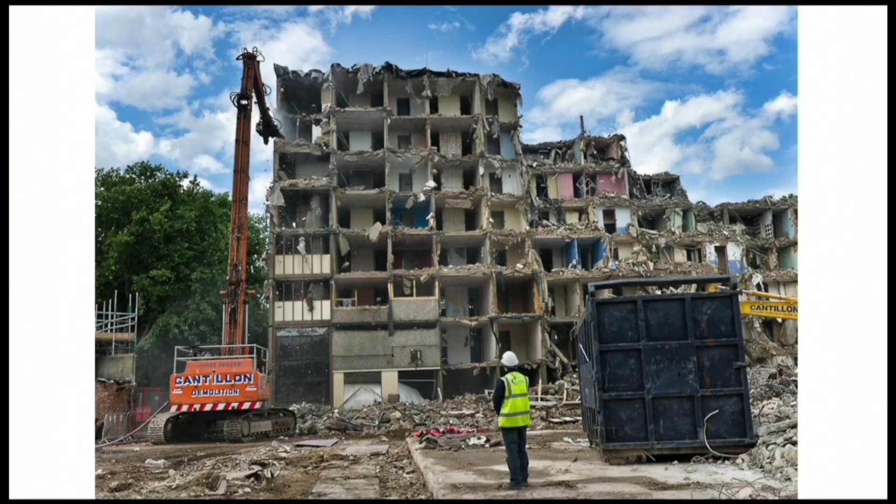This is a very familiar sight for us in and around London, and it's neatly captioned by a quote from David Cameron, who said: 'Post-war estates across the country are ripe for redevelopment. We will sweep away the planning blockages and take new steps to reduce political and reputational risk for projects' key decision makers.' That's sinister, isn't it? And investors: 'I believe that together we can tear down anything that stands in our way.'

And tear it down they have, and I dare say this is not an unfamiliar sight for you as well. And in its place, and in other places which could well be developed for social housing, we have this kind of thing. This is South London, it's Battersea. And this is sort of global capitalism descending on a site in central London and making of it what it will. Sort of just capital in its most abstract form, swirling around, smashing buildings down, throwing up other buildings. And this is housing seen as investment vehicle, as commodity, and not as basic infrastructure.

And I think this lies at the heart of the crisis which we're facing at the moment in London, presumably one of the richest cities the world has ever known. There are currently 170,000 homeless people - nearly 10,000 of them living on the streets, but also people living in temporary accommodation and in hostels. So it's a shameful situation, and as I say, if the post-war generation were able to deal with this, then surely we, a much wealthier country now, ought to be able to do the same.

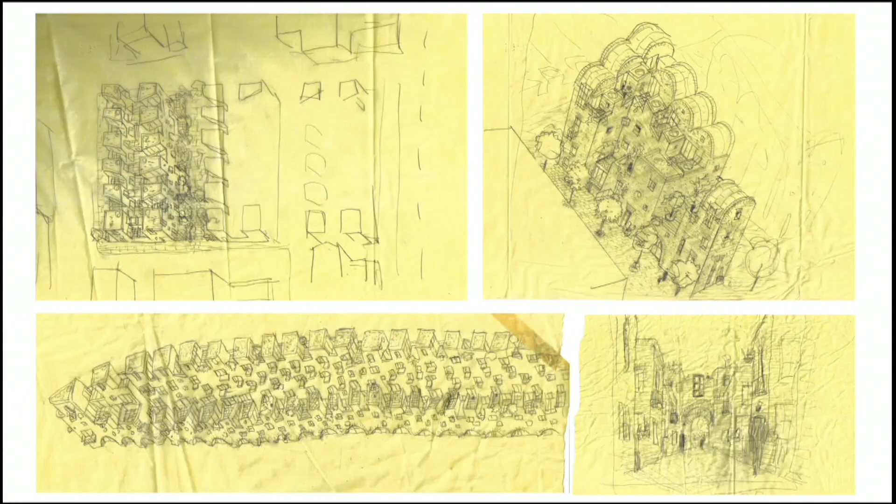I'm an inveterate sketcher, and I have sketchbooks, but when it comes to the projects themselves, I also overlay sheets of yellow tracing paper, and in a sort of additive, iterative process, build up layers, layer upon layer, the changing design as it develops. It's quite fun sometimes to go back through where you started and where you get to. So here are some examples, working three-dimensionally a great deal as well.

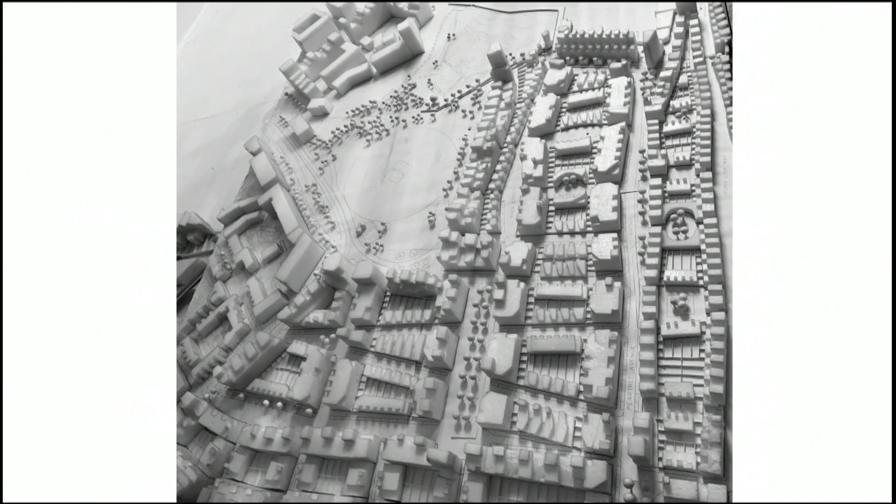And then the very large-scale models. This is a model we made of Greenwich Millennium Village, which we were involved with at the early stage. These are foam models at quite small scale, where we can see urban form, massing, the width of streets, and understand whether buildings are too close together or whether they feel about right.

And then we go up a scale, where we're starting to look at fenestration and in more detail at the public spaces we're creating. And upper scale again, where we can start to look at interiors. So that model in reality is probably about that big.

So this is the first of the built projects I'm going to show you. It's called Donnybrook, and we basically cut our teeth on this project. It's 50 or so homes. It was a competition run by the Architecture Foundation in London. 100 or so, more than 100 practices went in for it, and we hit the jackpot with it, which we had no right to do because there was only 2 of us in the office. We didn't really know what we were doing, but sometimes that's quite an advantage - you do things which you wouldn't perhaps do if you were a bit more jaded.

And so this is a project which has got 50 or so homes in it. You can see if we can get this pointer working.

No, not that one. Oh, what have I done? Help! Could somebody help? Oh, there we go.

So that's it there, look. There are 2 streets, you know, I was talking about streets. This competition, I think, was asking for a fence around the site and an apartment building in the middle of it. Well, we inverted it, and we said on our competition boards, because you always need a strap line, this scheme is a celebration of the public social life of the street. They didn't ask for streets in the competition, but it captured the imagination of, I think, the judges. So there are 2 streets, and it widens out a little square in between the buildings.

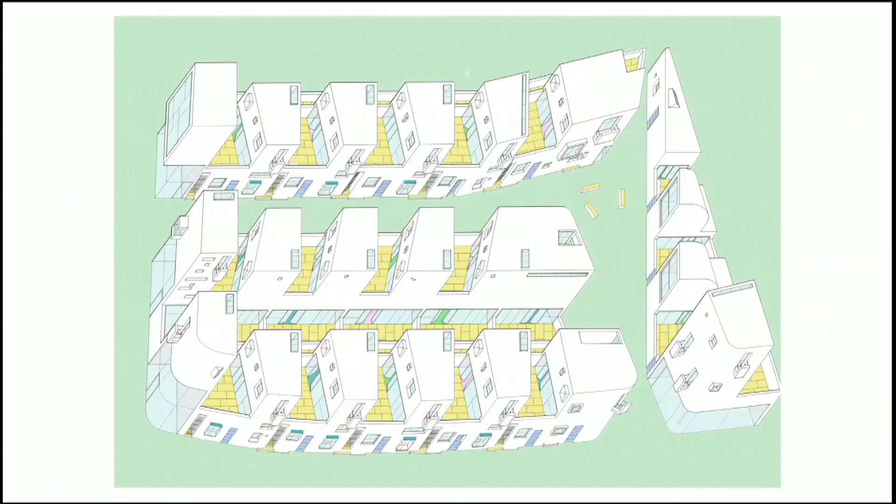The ground floor is a single-storey 2-bedroom unit, which has a rear courtyard. The buildings come right up to the street edge, and our client at the time, when we won the competition, said we need front gardens - defensible space was what people talked about in those days. And I'm thinking, well, defense against who? You know, my neighbors. This is the house where I lived at the time. And it seems wonderful to me what can happen when people have ownership of a space at the edge of the street and can take control of it.

So this is the type, as I say - these are cottage flats, sometimes called Tyneside flats, where you go into a house there, which is a ground floor house, and up to a house there, a flat there, which is the upper flat. So they look like houses, but they're flats.

And these roof terraces up at 2nd and 3rd floor level - again, I was able to take people. I'm a great believer in finding a precedent for what we're doing. I feel very reassured by precedent, and I think it also helps with clients as well. So the miracle was that it got built.

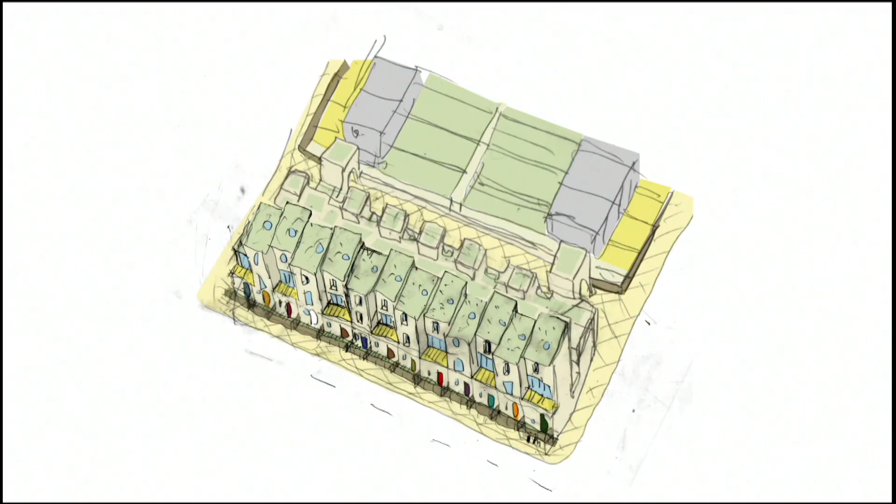So the next project is more conventional. The one I've just shown you is a reworking of a pre-modern way of doing flats. This is more conventional because these are townhouses, and it's another social housing project.

I teach a day a week, and we'd come back from a trip to India, and I imported this idea of what they call Jali walls—a perforated brick wall—as a way of celebrating the street edge, but also the arches, which are ubiquitous both in India and in the UK, as a way of making a building with a powerfully civic presence.

It belongs to the street, it belongs to the city, but also each one of these gardens belongs to a person who lives there. The articulation of the roof also emphasizes the notion of it being a terrace of houses about the street and about continuity, but each separate occupancy is celebrated in the architectural detail.

Increasingly we work with brick. Some of the early projects are render—sometimes white render—and sometimes those rendered projects are really well looked after; Donnybrook has been, others haven't. So where we're working for social housing providers, who have thousands of properties to look after and not very much money to do so, it feels to me now like brick is a better option, although from an ecological perspective it has its challenges.

This brings me to another social housing project in the East End of London, in Stepney this time. These garages and storage units lie at the back of a 1950s, 1960s housing project. Our client said we've got terrible overcrowding problems, big extended families living in 2-bedroom flats. Could you build 2 or 3 houses on this site, and use all that green space and everything else?

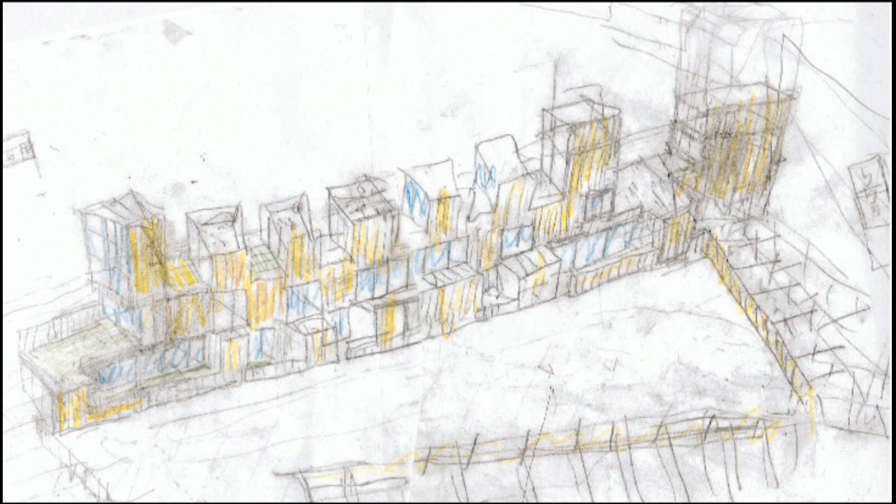When we get a new project, you're always looking for a ray of sunshine. It was quite an unforgiving site, not the loveliest place, but we found these gardens, these timber fences where people had started to take control of the space outside the back of their houses. So we came up with the idea of a timber building, echoing the timber of those fences and the informality of that, pushed back against the boundary, trying to retain the green space in the middle to be shared by existing residents and new people moving in. By sharing the garden rather than everybody having their own, and giving them all roof terraces, we were able to get 7 or 8 townhouses rather than 3. Our unconventional design really unlocked the possibilities of the site.

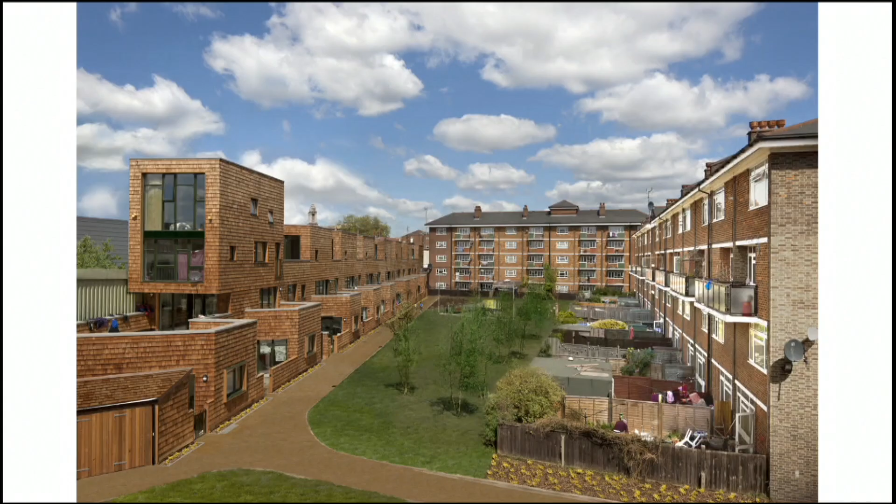It still feels like a miracle, even though we finished this project years ago, when you go from a sketch - and that was one of the early sketches of the project I just showed you - and it comes out pretty much as you thought it might, hoped it might. So these are enormous houses. That one in the foreground is a 7-bedroom house.

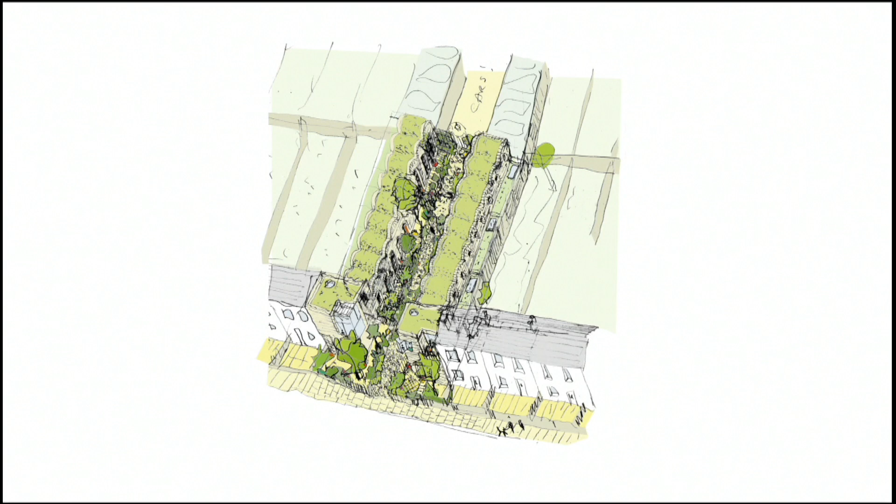So that sort of logic talks about an architecture, a type of housing which suits people who are very sociable. I think a point here is that there are all sorts of people in this world, and the attempts that government and legislators make to try to legislate housing to suggest there's a Mr. and Mrs. entirely normal, and that everybody wants the same things from their home, is such a nonsense, isn't it?

For one person living at the top of a tower block, sick of seeing people all day, wanting isolation with a view, that's understandable. But for other people, living on the street edge, knowing their neighbours, having that more intense relationship, suits them. So when anybody tries to tell me what housing should be, I remind them that there are so many sorts of people in this world, and housing should reflect that in all its different forms.

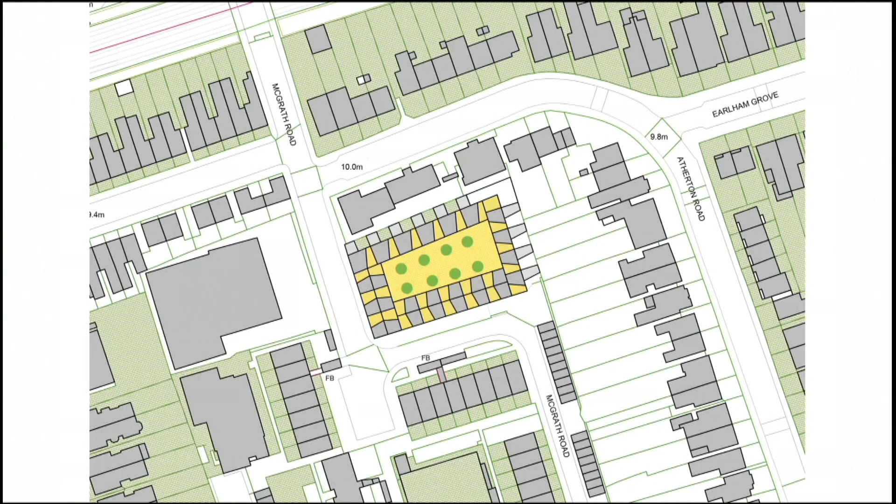So this is another back-to-back housing scheme. It's in a 60s housing estate. It was an empty site. It makes a corner here - those are two streets. It backs onto some Victorian housing here and some 80s housing here. Each one of those is a house. Those are all houses fronting this way, and those are all houses fronting into a central courtyard. You have 4-story houses, 3-story houses, and an archway which brings you into this courtyard and another one which brings you out here.

In that house there's a kitchen on the ground floor, a bedroom, and a living room, and the living room has a little courtyard up at the top of the house.

I did a talk once at the RIBA in London, before we built any back-to-back housing, and I was saying I'm thinking of doing some back-to-back housing. We think it's a really interesting way of building quite sustainably, because there's not a lot of external wall to deal with, and quite cheaply for the same reason. It seems to me a type that really helps produce a kind of sociable vibe amongst neighbours. And so we had the Q&A, and somebody stood up at the end and said, well, I grew up in back-to-back housing and it was hell.

Awkward. It's really the unhappiest time of my life, they said. And to my relief, somebody straight after stood up and said, well, I grew up in back-to-back housing and it was the happiest time of my life. It comes back to the point that what suits one person doesn't suit another person. But it also reinforces the responsibility that comes with housing. It's quite a scary thing, because when it's done wrong and things go wrong, it's not going to get knocked down. It'll be there for decades and will affect the lives of generations.

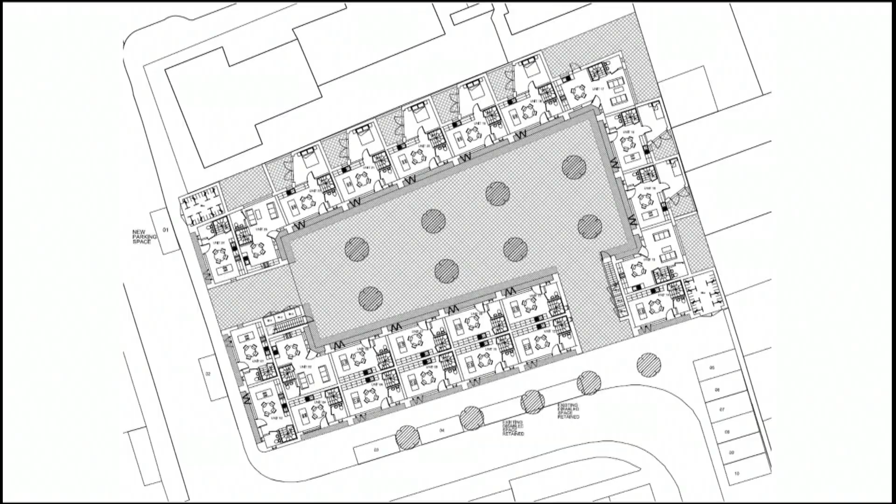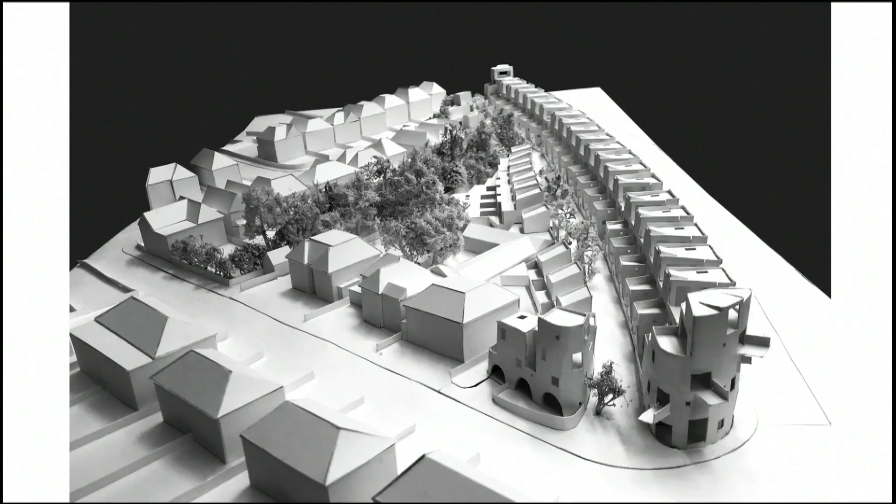Richard was talking about our project on a motorway. We get lots of rubbish sites, but this really took the biscuit.

So that there, around there - oh, sorry - that there, around there is the motorway.

We won this in competition, and all the other projects - it's a very difficult site - had 3 or 4 apartment buildings along this long site. Their approach, they managed to get 50 or so homes. We got 100 homes with a project where the architectural strategy really unlocked the site.

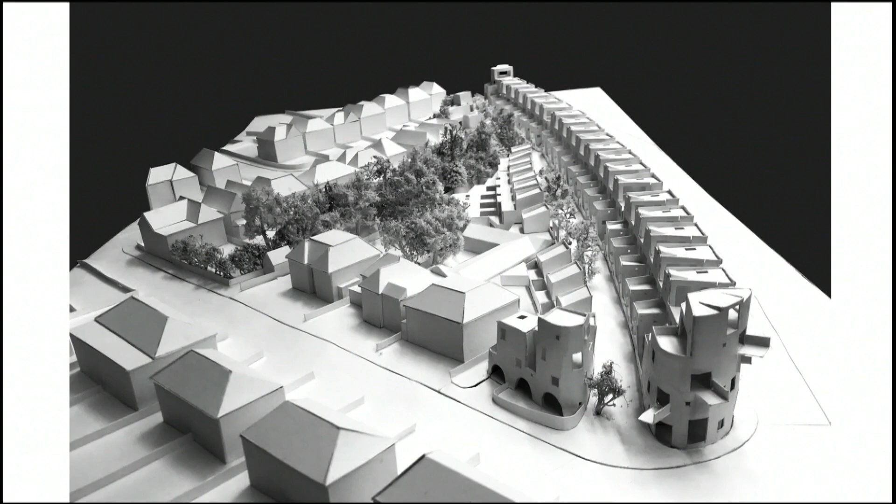The strategy was to build a wall building against the motorway, thin enough that it's one room deep, so every room in this wall building can have a window opening into what is here, a little mews street, where you could literally hear a pin drop. You would never know that the traffic was thundering past on the other side of the road.

And there is that terrace of effectively tenement blocks, kind of walk-ups - each one's a little tenement with one flat per floor - and then a row of houses on this side.

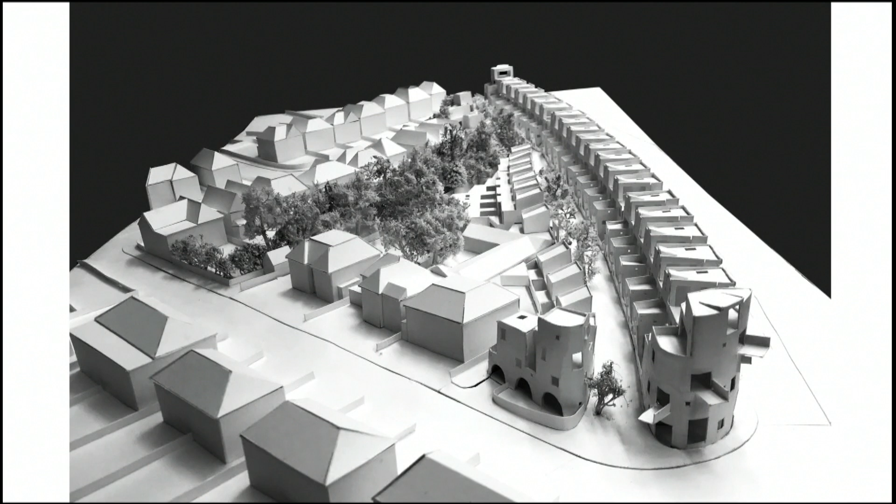And again, that's a sketch done virtually on day one. It's not that I'm inflexible or anything - how about that? If it had been that easy, that would have been good.

So there was repetition again in here, but a recognition that this corner is rather special, and there's an apartment building with a little lift in it, and 2 flats per floor.

We're making something of the entrance into the mews, but also something that you see as you drive down the main road. So it's an interesting project because the identity of this side is quite muscular, quite heroic, quite bold and solid, gives way on the other side to this space which feels much more domestic - it's softer, softened by the greenery, but also by the stepping of the architecture in these terraces.

I look forward to revisiting each summer to see what started to happen - this is a few months in - and it will hopefully gather pace as people really start to take control of the space that we've created for them here.

Incidentally, it was a requirement of planning that we had car parking, but there was a steep slope across the site, so there was actually a car park underneath here.

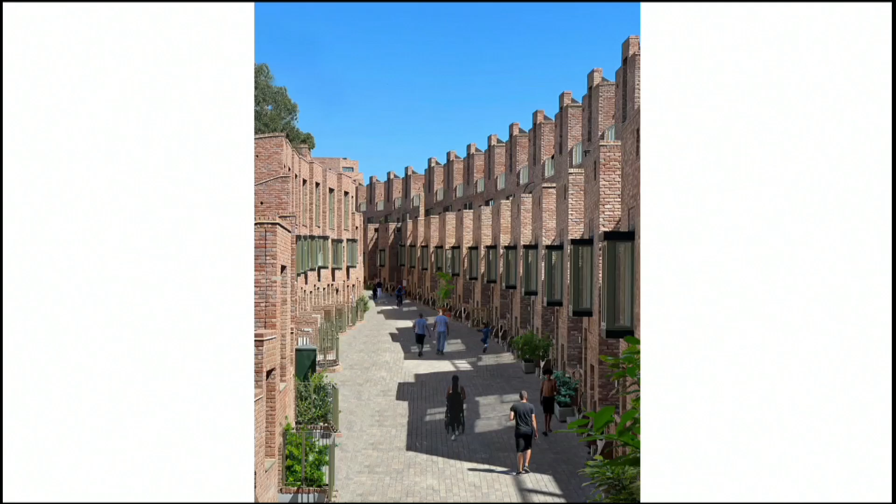So as our buildings get bigger, we try to stick to our guns - the importance of the street, active frontages on the street, front doors at regular intervals along the street.

The modernist apartment building often had a single point of access, and very often the city really wasn't greatly of interest to some of these people, or certainly the street wasn't.

But when we do our bigger apartment buildings, we're saying it remains really important how it relates to the street. So each of these ground floor units is actually a maisonette, like a little house, with its own way in through a gate into each separate unit.

One of these gates leads into a staircase and lift, which brings you up into the main part of the project. So even when we get bigger with our projects, we still attach a great deal of interest to the street, and we're also after a degree of visual complexity.

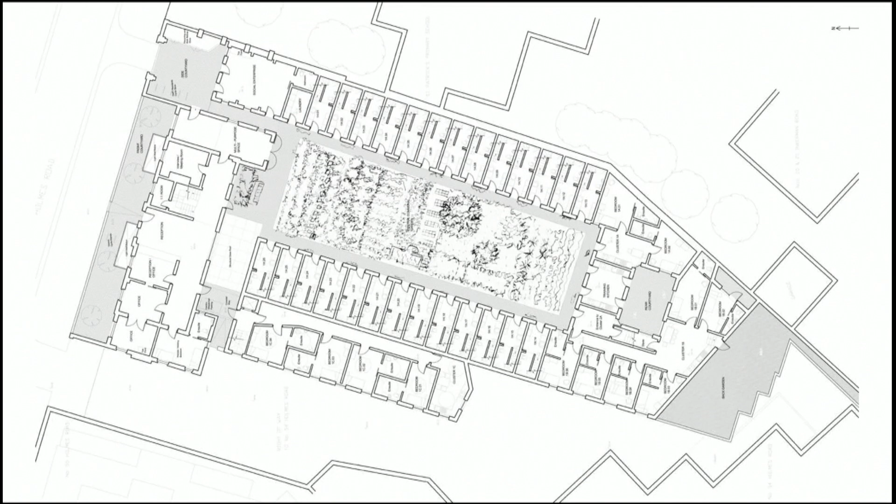Tiny it is, it's temporary accommodation. Each one of those is a house you could virtually touch the walls of either side of it. But this is as opposed to living in either a dormitory or living in a tiny ensuite, or even sometimes not an ensuite. It's a brilliant funding stream that came from the then Labour government, which was about trying to improve people's life chances who live in homeless hostels.

It wasn't just about getting people off the street. It's about working with them to help train them about looking after themselves, looking after their medical conditions, their addiction problems, their mental health issues, and trying to teach them practical skills about cooking for themselves, shopping.

And so, very often, this is the entrance area of a hostel. Very often, the entrance area to a hostel is all about protecting the staff. You know, you go in, there's a little hatch. What do you want? I need a room. Okay, come in. And it's a kind of airlock situation. Well, the new hostels, and I was talking to somebody earlier on who was talking about this very same thing, are much more open.

They feel much more like going into a lovely hotel. On the left-hand side is a reception desk, there's a sofa over here. If things get tricky, well, come sit over there and chat about it. Through there you can see some counselling spaces and training spaces, and a courtyard garden. It's not just about the building, it's about the programs run within them, the amazing work people are able to do, and the way architecture can assist them in achieving that.

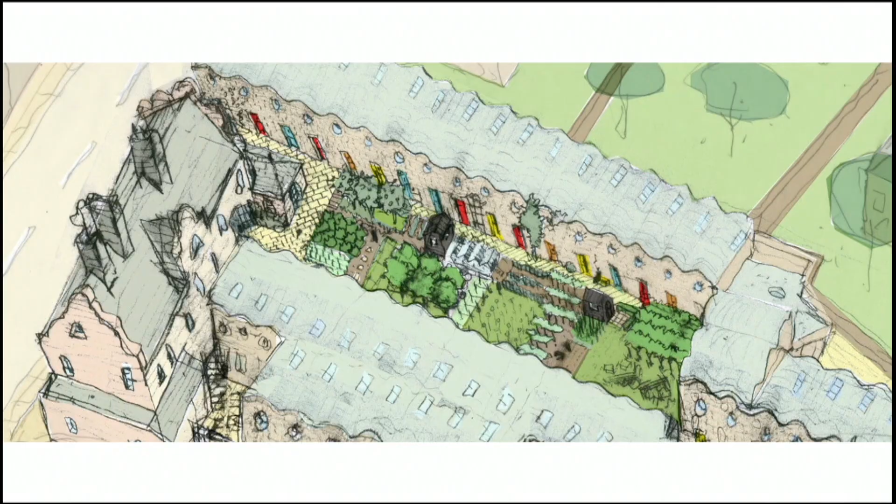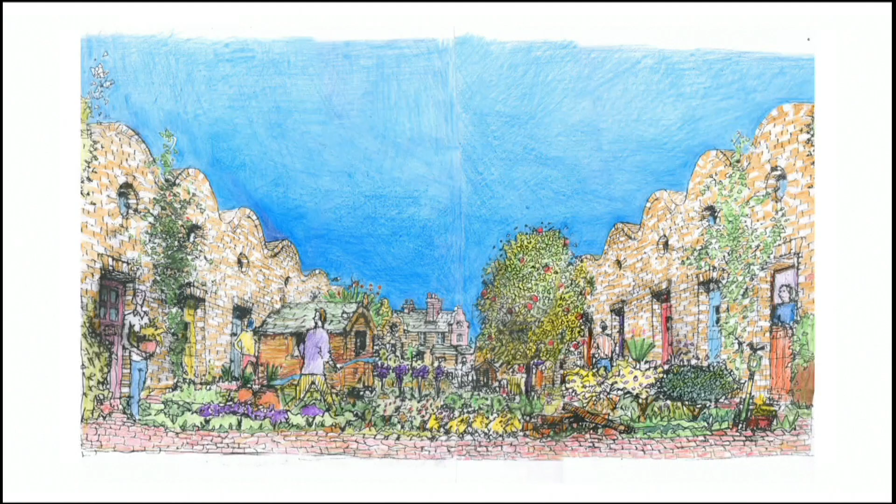So here's our project, the existing building on the left-hand end, the courtyard garden. This is a drawing I did when we went to see the council, and I read to them what I'm about to read to you now.

We imagine a group of residents working with a gardener to create and maintain an intensely planted and beautiful garden, an apple tree or two, potatoes, green veg, soft fruit, herbs, a greenhouse, a potting shed, and a sunny spot to sit and rest. We think there ought to be a little shed in the garden - that's that thing up in the middle there - for private chats, one-to-one, and counselling. Conceived as the social heart of the hostel, the garden creates a homely, domestic atmosphere. It gives participating residents an interest and an outlet for their energy, helping to foster a sense of belonging, self-worth, and empowerment. So this was our idea for the project, and Camden bought into it.

We've been, as a practice, involved in helping with that garden, both in funding it and working with residents there. And to see the effect a space like this can have on people, many of them with quite severe difficulties - I remember one guy being brought down who was in the middle of the most depressive episode, and he was brought down by his mates, and they more or less held his hands while he planted a plant there. A very tender and lovely moment, made possible because Camden were supportive of the idea of a garden, because we suggested it. It just shows what architecture can do when you encounter it first hand.

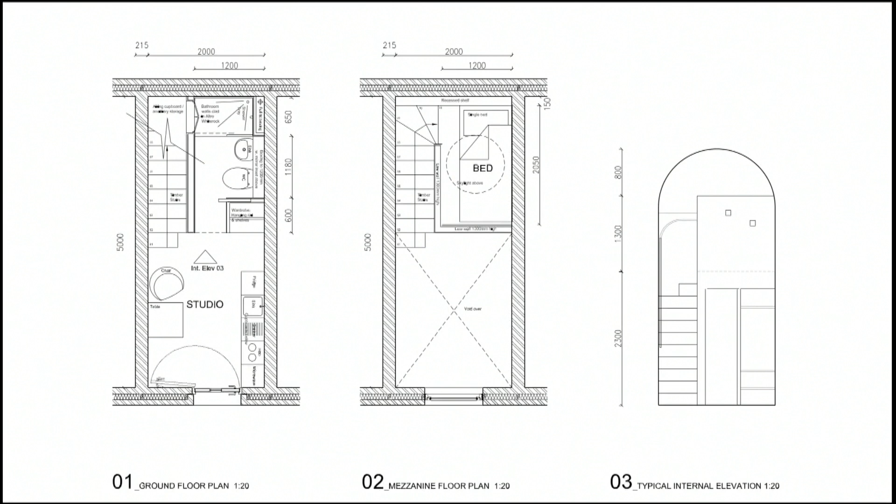So back at Holmes Road, this is one of the little units we designed. As I say, you can virtually touch the walls of it. There's a tiny kitchenette, there's a shower room. You walk in through this stable door, a shower room underneath there, then you walk upstairs onto a bedroom which is underneath this kind of vaulted roof. Again, we work with models to reassure ourselves that it's quite compact, that the place is working for us. There's a view from one of the homes into the garden.

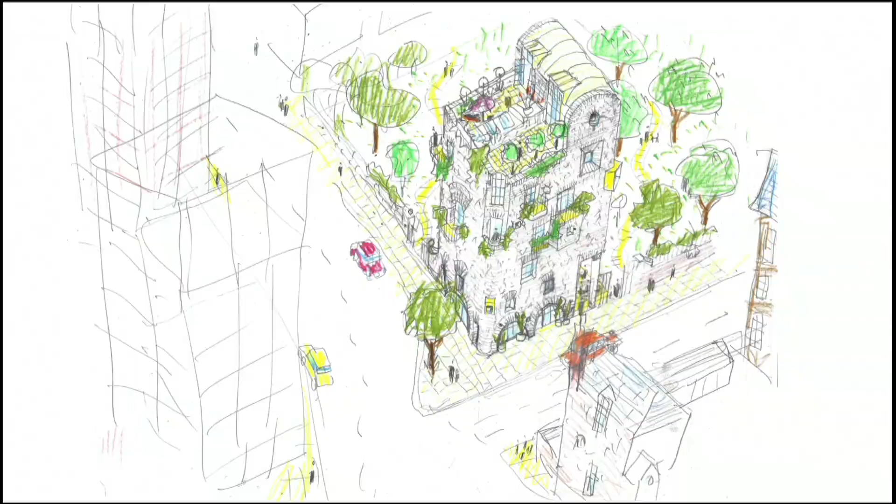And it brings things a bit more up to date - another little housing project we're doing in South London. This is in Germany, where we're trying to do a project with timber shingles, a bit like the timber shingles we used on the Stepney project, where they have very large butterflies.

Got a bit carried away there. Right, okay, so this is the last part of the talk. How are we doing?

Is it okay? So this is a bit about dreams, really. And as I said, when you work—are you all architects? Hands up, who's an architect? Oh my God, okay. Well, it's quite challenging at times, isn't it?

I do think that we should have a space to dream. And my space to dream is in my sketchbooks and in my idle moments.

I did this project called 1 Year, 365 Cities, in which I attempted to design a city a day. My mate said you can design a city in 10 minutes, which is kind of an arrogant thing to say, but I tried. I had a train journey, so I tried to spend 10 minutes of that journey designing a city a day for a year, and I actually failed. I got to about 150, and then it got a bit dull.

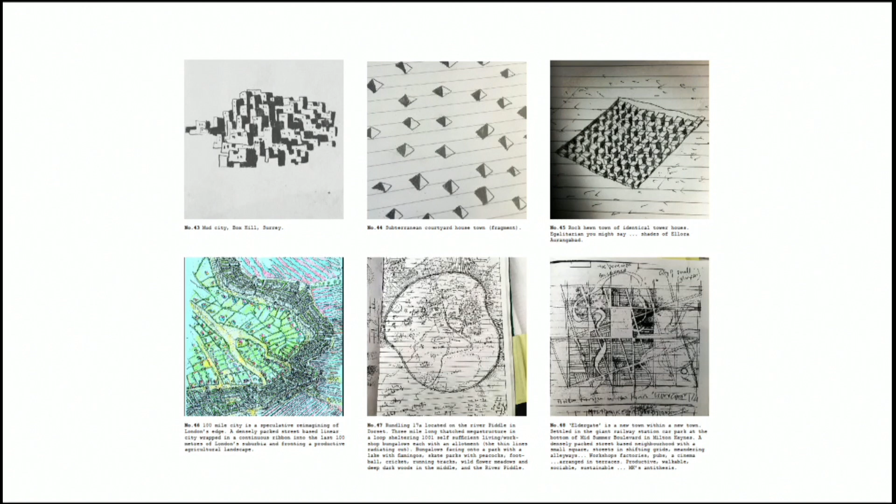So these are some of the sketches out of my sketchbooks for this. There's mud ones, there's stone ones, there's one made out of mushroom spores—all sorts of things. I haven't got time to go into them, but here are some sketches.

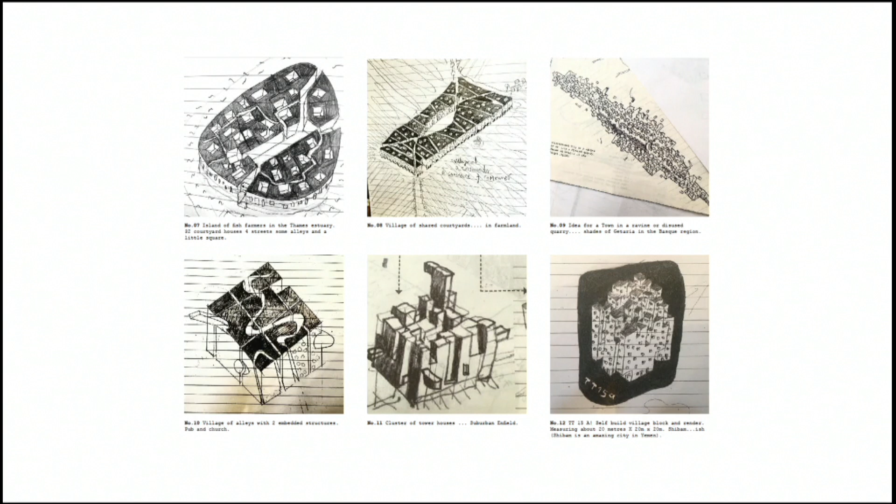This is a space—so I also teach a day a week, which is another space for dreaming. Lots of academic institutions say we get architects in so we have a bit of common sense coming into our rather arty, flighty kind of thing. I think it's the other way around. I think people talk common sense in academia, and what's going on out here, where there are hundreds of thousands of homeless people, that's insanity. So I go into college to dream a little bit about how things might be better—if we could think of another way of organising our economy, and challenge some of the assumptions and preconceptions that people have about how we organise things.

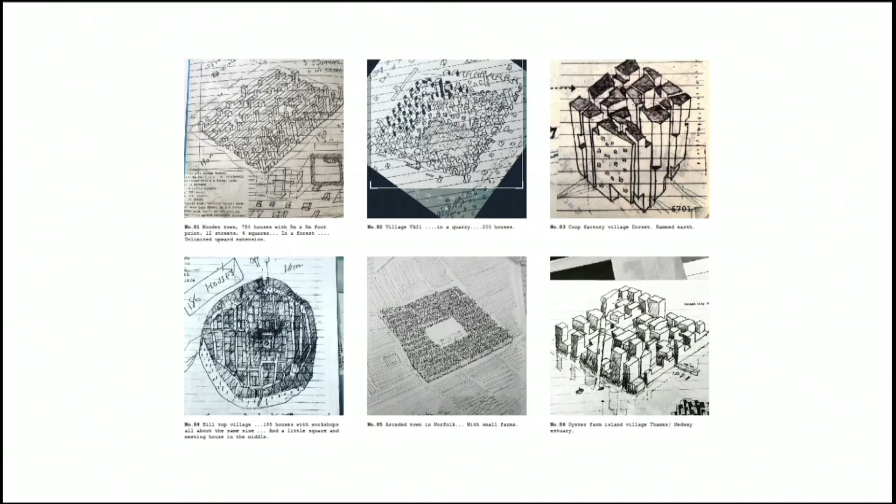So that's, in a sense, these drawings and sketches and sometimes models are kind of annexed to that mindset. And sometimes my 10-minute town gets a bit more carried away, and we start making ceramic models. This is an idea for a mud village in Wiltshire.

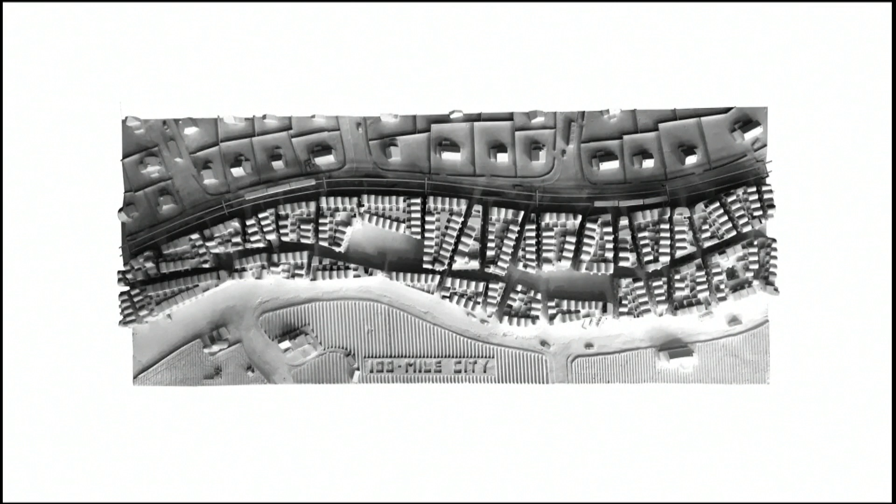This was an idea we called 100-Mile City. It was the idea that the circumference of London is 100 miles long. If we're going to build a ton more housing in London, would this not be the place to do it—not spreading out into suburbia or the green belt, but taking the last 100 metres of suburbia to create a proper city surrounding London, with schools, infrastructure, a transport system, and so on.

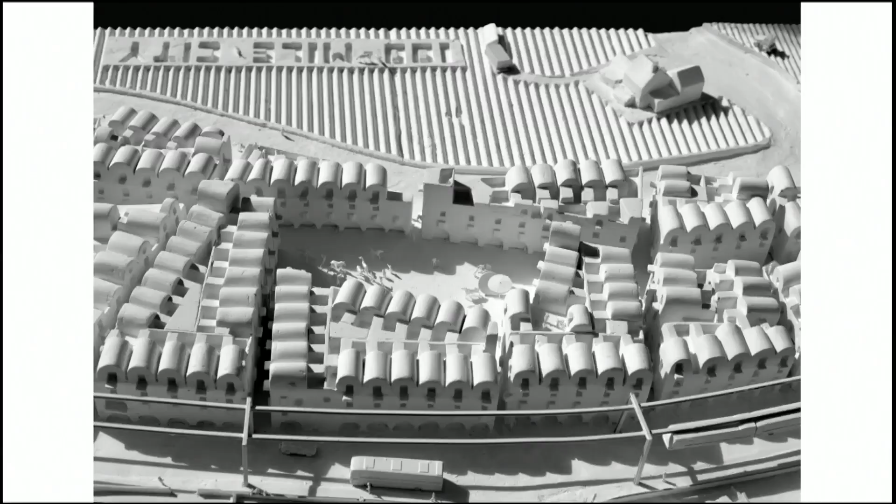And again, one got a little carried away. Very carried away. So this is the last little bit, okay?

If you think 100-Mile City is a sort of a bit—well, this one's called 8,000-Mile Island. I started thinking, where I started this lecture, about all these hundreds of thousands of empty homes, and started to think about the investment of most of our resources in the southeast of England, and most of that in London, and thinking that isn't where the money is needed. The money is needed in other parts of these islands. In thinking about it, I started to reflect on the fact that some of the most challenged areas of our island are in the coastal cities, which have historically been centres of production for the fishing industry, for shipbuilding, for steelworks.

I started thinking about the coastline, and it's absolutely unique for our country—an 8,000-mile long coastline. Nobody lives more than, is it 100 miles from the sea here? We have the most powerful tides in the world, apart from the east coast of Canada—off the west coast of Wales it's like 5 storeys between high and low tide out at sea. So this is a really powerful idea in terms of the potential for us generating energy. We have the strongest winds in Europe. So I started to think about these quite big issues and how they all might be interrelated in some way.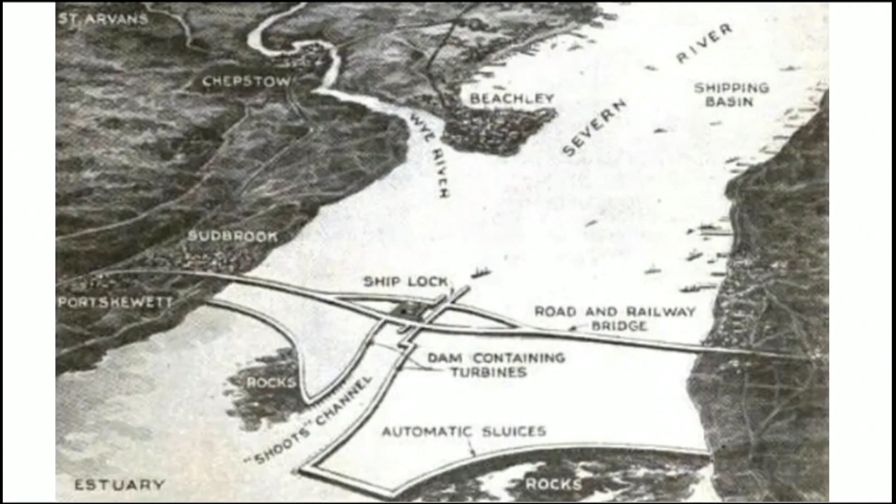Let's intersperse these offshore energy industries with enormous seaweed farms. Give us hundreds of deep-sea coastal oyster beds, mussel farms, fish and lobster hatcheries, floating fish farms in the deep ocean producing hundreds of thousands of tons of food and millions of gallons of fish shit fertilizer to supply to aquaponic farms. Construct maritime research stations in a necklace around these islands. Link them to our coastal universities, adding to and sharing knowledge of these nascent technologies and processes for the benefit of everyone. Imagine existing fishing fleets, their local knowledge, their know-how and equipment co-opted into these burgeoning industries.

Employ the infrastructure already existing in the UK's declining offshore oil and shipbuilding industries, in Hull, Inverness and on the Clyde, and think of thousands of new jobs in tired old Blackpool, Margate, St Leonard's, Southend-on-Sea and Newhaven. Think of the housing industry redeployed away from the southeast and charged with saving and restoring hundreds of thousands of empty homes, whole streets and neighbourhoods currently abandoned, in decay, now buzzing with new life.

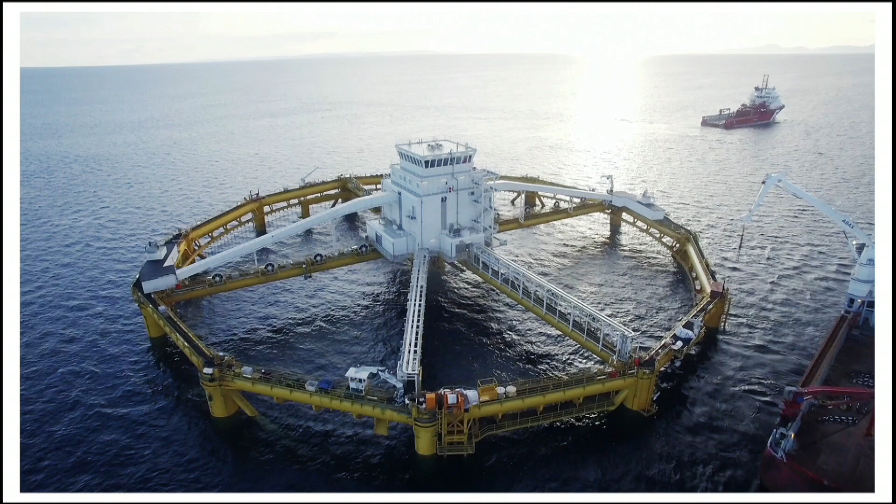Let's think carefully about how these nationalised industries might make the best of top-down strategic planning, organisation and funding by central government, combined with devolved management, bottom-up, employing local knowledge, practically, usefully and efficiently applied. And let's also think about how the profits from these processes and nationally owned industries might, as they have in Norway, be reinvested into a sovereign wealth fund for the benefit of each and every citizen in our country. Thank you.